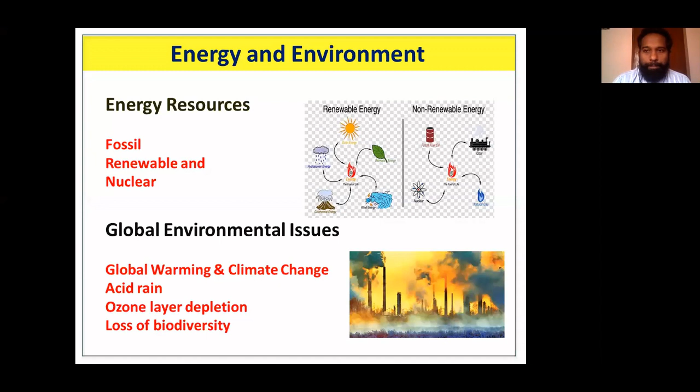Sir, kindly change this slide. They are asking to change it. Yeah, yeah, no, we don't look at the slide.

Because of fossil fuel consumption, currently we face two problems: depletion of fossil fuels along with increasing demand, and environmental damage. To address these two main issues, there are only two solutions: either we reduce our energy consumption through energy efficiency measures and energy audits, or we switch over to alternative energy sources like renewable energy.

Here we focus on reduction of energy through energy auditing. The other solution is renewable energy, which we will discuss in the next webinar.

For sustainable development, energy is the key for any developmental activity. Countries which use energy efficiently will succeed economically. Whatever we use should be in an optimized manner so that we can save something for our future generation. Sustainable development is development that meets the needs of the present without compromising the ability of future generations to meet their own needs.

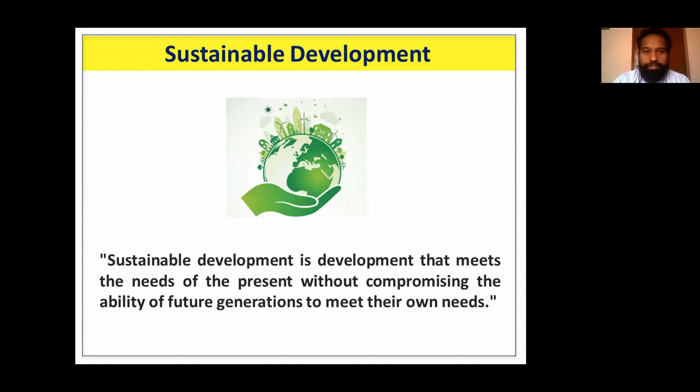Let us understand energy efficiency and energy conservation. Though both appear similar and related, they have distinct definitions. Energy efficiency is using less energy for the same output or service. Energy conservation is linked with behavior change - reducing or going without the service to save energy.

Here is an example with a TV and the number of hours used. Instead of watching for 8 hours, if I watch for 4 hours, I am going without that service for 4 hours - that is an energy conservation practice, I am practicing energy conservation. Here I am not reducing the number of hours of TV usage, but I am using an energy efficient TV.

So I am watching 8 hours, but with energy efficient TV, here I am practicing energy efficiency. Another example: when you leave a room, you turn off all your lights. That is an energy conservation practice, you are avoiding and reducing that service. If you replace all your inefficient incandescent bulbs with energy efficient LED lightings, that is an energy efficiency practice. So both energy conservation and energy efficiency lead to monetary and energy savings.

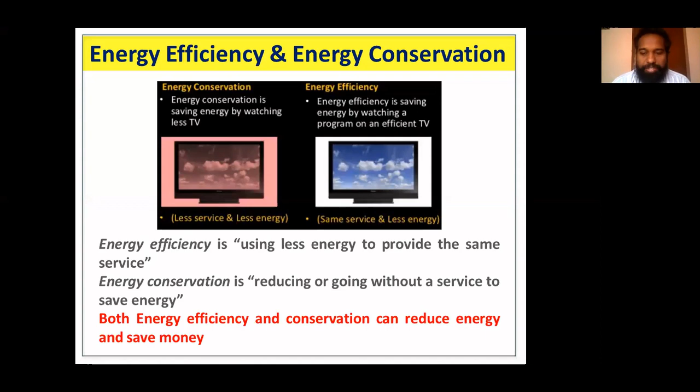So these are the benefits of practicing energy efficiency: reduced waste, reduced energy cost, improved quality, increased productivity and profits, increased competitiveness, minimal damage to the environment. It will ensure energy security, and finally, it will lead to sustainable development.

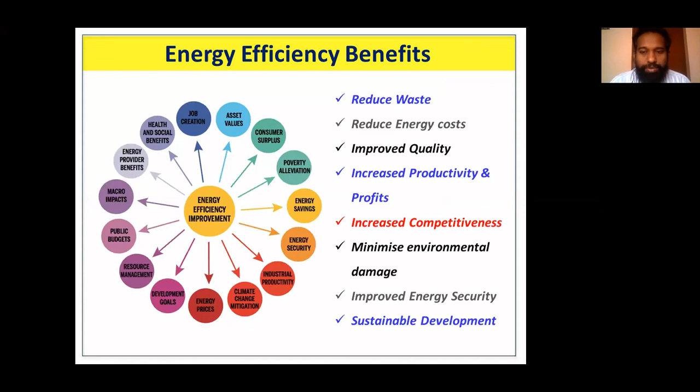So the basic definition of energy efficiency is useful energy output from total energy input.

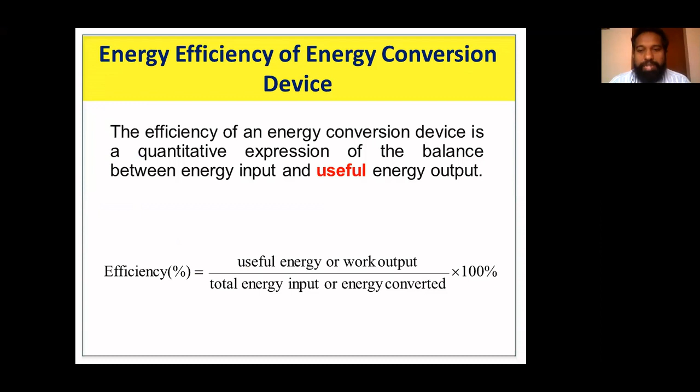Here you can see a list of various energy conversion devices which we use. Electric heater: electricity to thermal energy, efficiency 100%. Hair dryer, again 100%. Electric generator: mechanical energy to electricity, 95% efficiency. Large electric motors, 90%. Battery: chemical energy to electricity, 90%. Steam turbine: thermal to mechanical, 45%. Automobile engine, 25%. Fluorescent lamp: electricity to light energy, 20%. Incandescent bulb has very low efficiency: electrical energy to light energy, 5%.

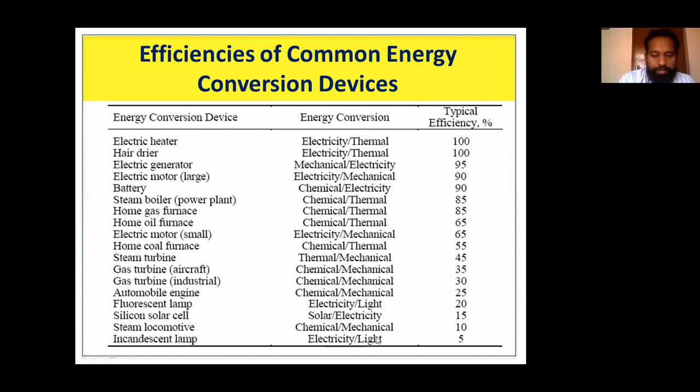So here let us understand overall efficiency. In a system, there are so many energy conversion devices. For example, here you can see a boiler, which is an energy conversion device, and we have turbine and generator. In a power plant, these energy conversion devices are used, and each will have a different efficiency. The boiler has efficiency about 88%, the turbine has efficiency of 40%, and the generator is 98%. So how do you arrive at overall efficiency?

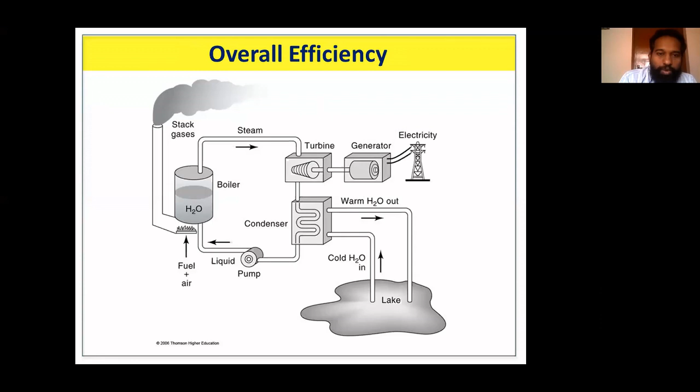In the boiler, chemical energy is converted into thermal energy, steam. The steam goes to the turbine, where the thermal energy is converted into mechanical energy. Again, the mechanical energy is converted into electrical energy. So overall efficiency equals efficiency of boiler multiplied by efficiency of turbine multiplied by efficiency of generator: 0.88 into 0.4 into 0.98, you will get 0.35. So the overall efficiency of the thermal power plant is just 35%.

So where does the remaining 65% go? That will be the waste heat from the thermal power plant. This heat will go either through the cooling tower to the water body as thermal pollution, or it will go through the stack.

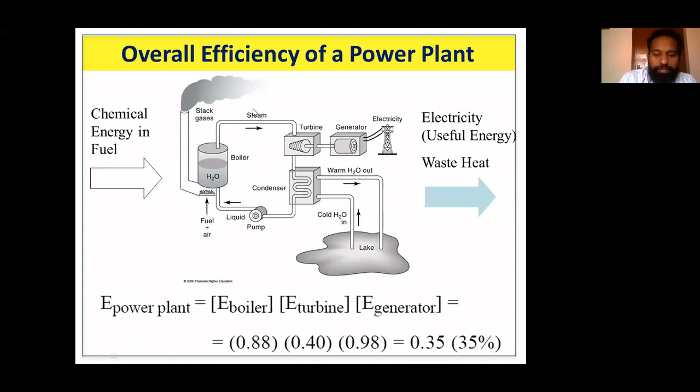So next one is the lighting system. Here also we will see the overall efficiency. Starting from the power plant, 35% efficiency, transmission lines 90% efficiency. We are using an incandescent bulb at home, so its efficiency is just 5%. So the overall efficiency from chemical energy, from fuel, till the light energy we get at the end - if you multiply all the efficiencies, you get only 1.6% efficiency.

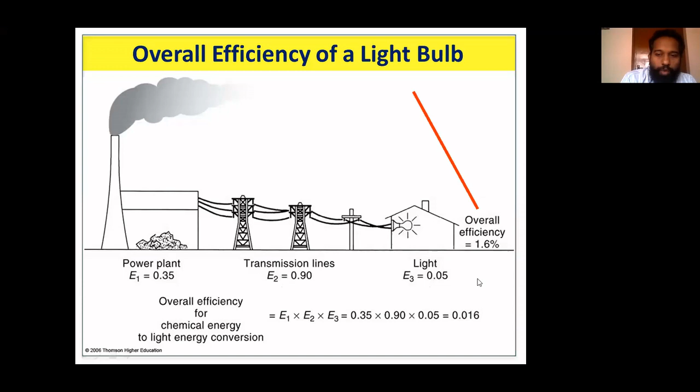So, energy audit. Energy audit is the tool and systematic approach to achieve energy efficiency. Through energy audit only, we can identify different energy waste streams and quantify them. As per the Energy Conservation Act 2001, it is defined as the analysis of use of energy efficiency in a factory or any industry, and it should also include a report which should have all your energy efficiency options along with cost benefit analysis.

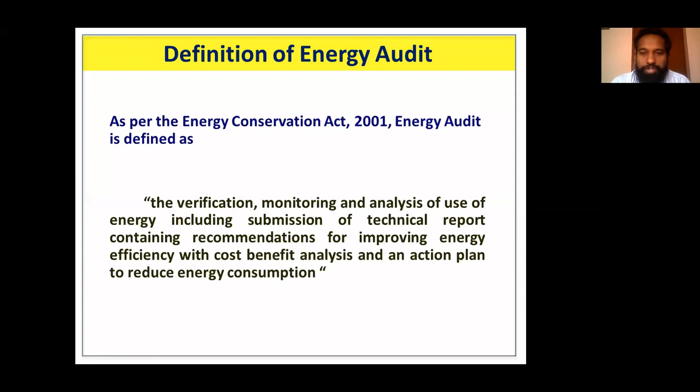There will not be any manufacturing process without a loss - all manufacturing processes will have a loss. So this energy audit will help us identify various losses resulting from an industry, and will also investigate all facets of the facility, historical and current use, to identify and quantify energy waste. It will also help us arrive at a benchmark: what is the energy consumption per unit of my product, the specific energy consumption - for example, I am consuming 200 units per ton of a product. This kind of reference benchmark you get only if you conduct energy audit.

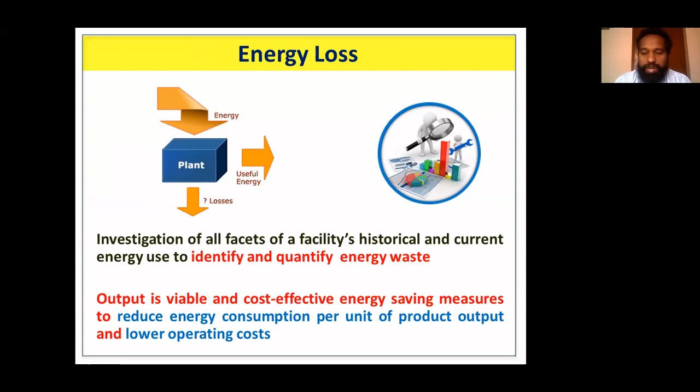So in any industry, there are three main operating expenses: one is energy, the second is labor, and materials. Energy is the top ranker of all cost reduction. So through energy audit, we try to reduce this energy cost, and this will also help us in managing energy in the organization.

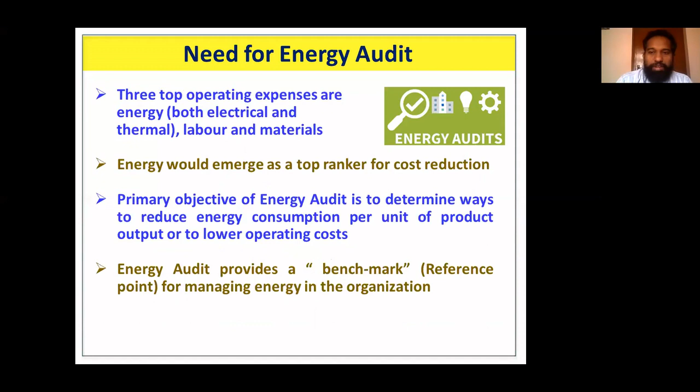Energy audit is classified into three main categories: preliminary energy audit, targeted energy audit, and detailed energy audit.

Preliminary energy audit is nothing but a walkthrough audit. While making a walkthrough in any industry, an energy auditor will observe some easily, readily available energy options, otherwise called low-hanging fruits. You will observe leakages like steam leakage, compressed air leakage, unnecessary lighting, and insulation problems. These things don't require detailed analysis. Just by walking through, an energy auditor, with his experience, will identify these simple measures, which are immediately readily implementable options. This is about preliminary energy audit.

Targeted energy audit is according to the requirement of the client. The client may require us to focus only on a particular energy intensive equipment, for example, refrigeration system, boiler, fan system, or compressor system. So we focus only on the targeted energy intensive equipment in targeted energy audit.

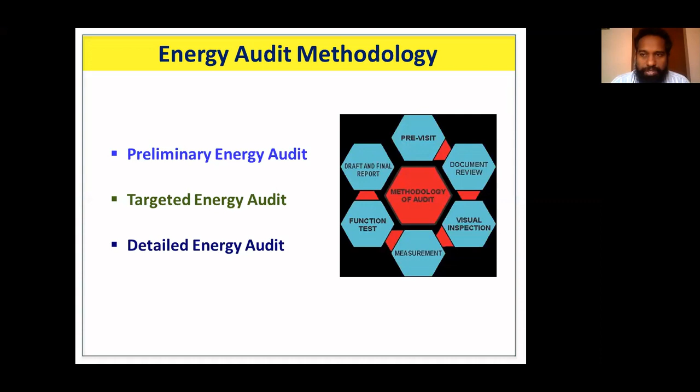In detailed energy audit, we thoroughly investigate all energy intensive equipments used by the industry. The preliminary energy audit takes just 1 or 2 days as a walkthrough audit. For target audit, it will take 1 week. Detailed energy audit will take 1 or 2 months.

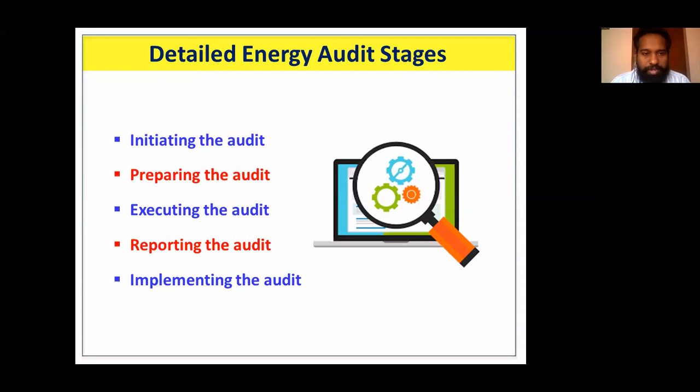There are different stages while doing detailed energy audit: initiating the audit, preparing the audit, executing the audit, reporting the audit, and implementing the audit. This is done in 10 steps.

In the first step, we try to get information from the client, historical and current data, all information from the client. In step 2, we plan how much time is required, what type of resources we require, propose the audit team, and determine what instruments are required. All these things we prepare in step 2.

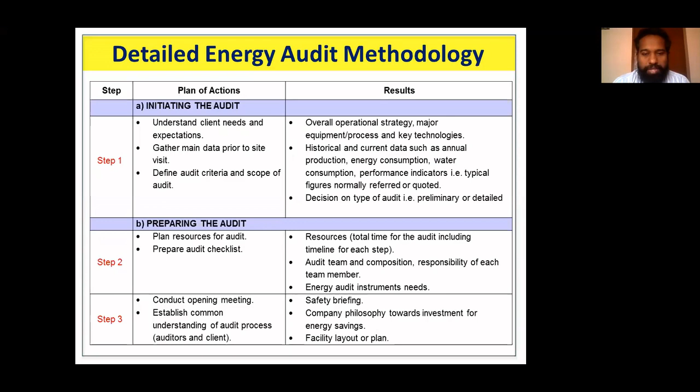In step 3, we conduct an opening meeting with the client and explain the audit process. In step 4, we again go to the field to gather more information and try to understand their process activities, operating practices, and their energy reporting and monitoring system, and we develop an energy utility diagram.

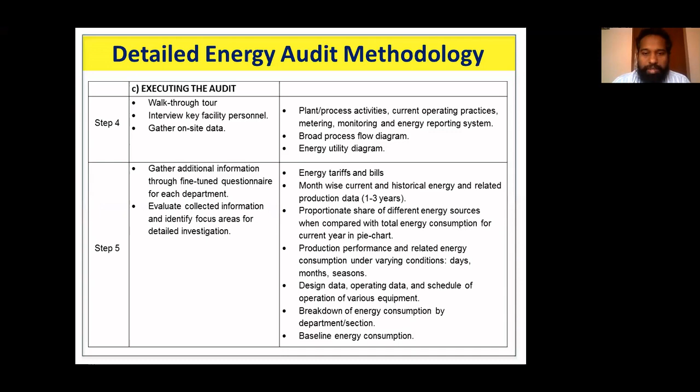In step 5, we gather additional information with the help of a questionnaire, so that we can compare the design data with the actual measurements.

In step 6, we conduct on-site trials in all energy intensive equipments. We conduct performance trials and evaluate performance, and cross-check with the design to see whether it is delivering the design values or whether the design has degraded.

In step 7, after conducting performance trials and getting data from the client, we analyze the data and do energy and material balance, and try to evolve energy conservation options with the help of a brainstorming session with vendors and the client.

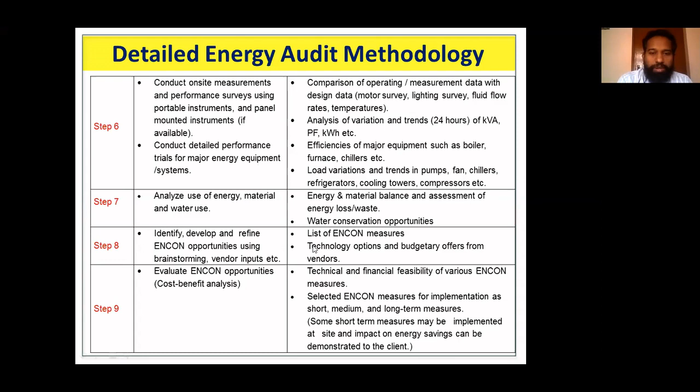In step 8, we list out the energy conservation measures, and in step 9, their cost benefit analysis. In step 10, we close the audit.

We make a brief presentation about the key findings to the client in the field itself. After coming back from the field, we do a detailed evaluation of all options, calculate their technical and economical viability of each option, and present it in the report, which is our final report.

Step 11 is out of the purview of the energy audit. It is the action plan for implementation of the suggested energy conservation measures.

For implementation, clients get it done either through energy service companies called ESCOs. For that, we also help them prepare a detailed project report, or DPR.

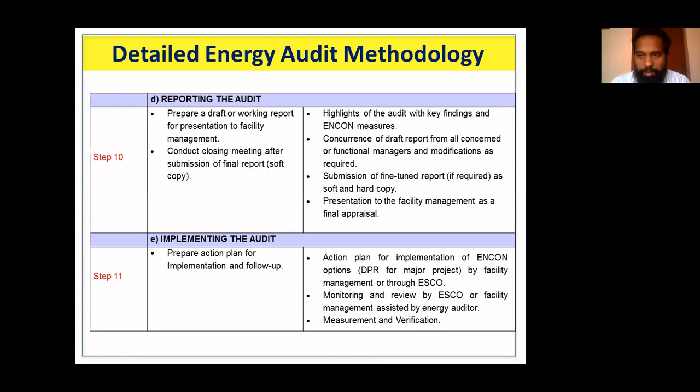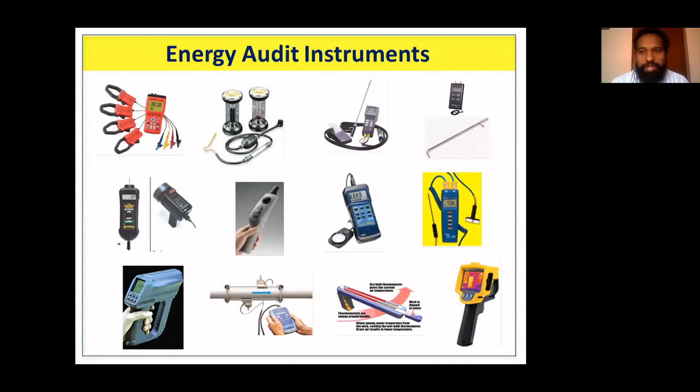Using these instruments, we conduct performance trials in the field.

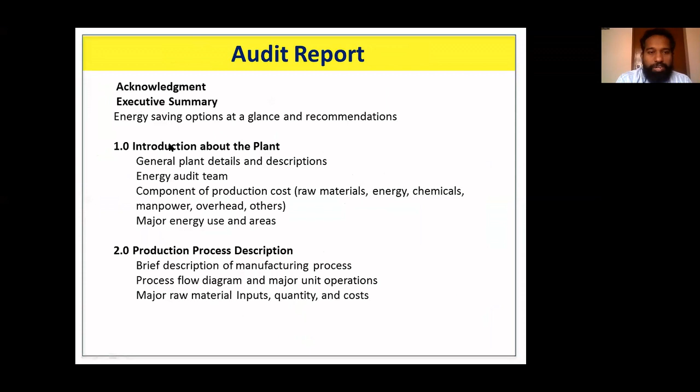This is the audit report format. It should start with acknowledgement and the executive summary. The executive summary should present all energy saving options with cost benefit analysis. Then we have an introduction about the plant, followed by production process description and energy and utility system description.

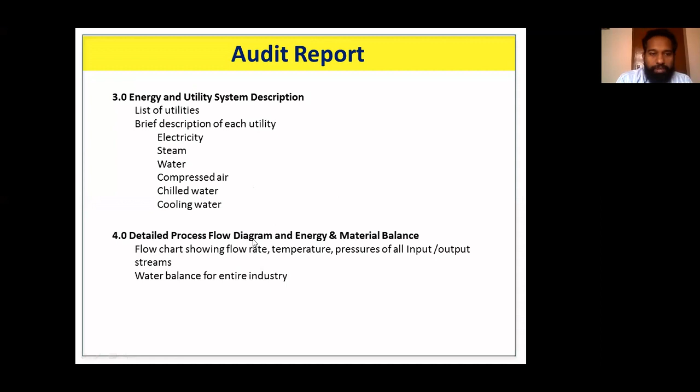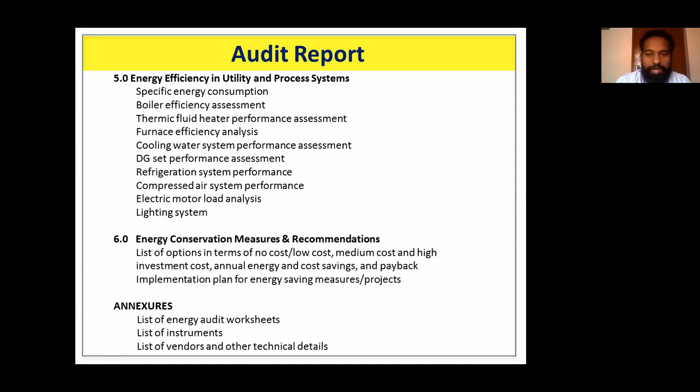In chapter 4, we present a detailed process flow diagram and energy and material balance. In chapter 5, we present all measurements done on energy intensive equipments, the performance assessment trials. Finally, in chapter 6, we present all energy conservation measures and recommendations. In the annexures, we include worksheets and a list of instruments and vendors where they can get the required energy efficient technology.

So for implementing the energy efficiency measure, ISO 50001 is also a tool that aids the implementation process. ESCOs also help, and we, NPC, also help in preparing a detailed project report for quick decision making.

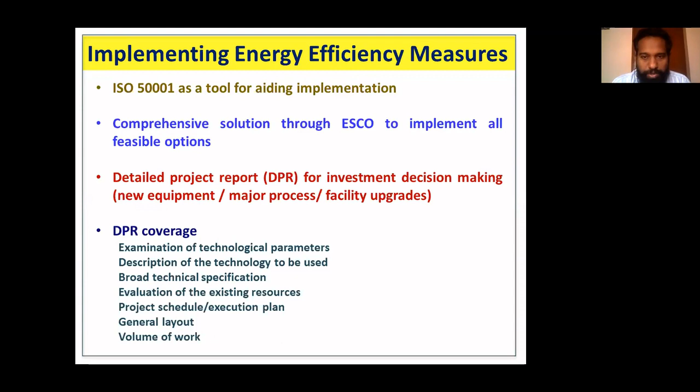So now we have understood about the audit methodology. Now we will move on to how to do energy auditing of electrical equipment.

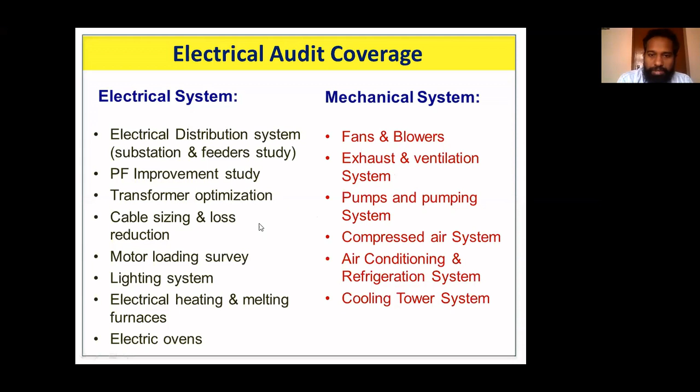As far as the electrical system is concerned, the scope for energy saving is very less. If you look at the pure electrical system, it will have only the electrical distribution system, transformers, and motors. Our focus should be more on driven systems - mechanical systems like fans and blowers, exhaust ventilation systems, pumps and pumping systems, compressed air systems, air conditioning systems, and cooling tower systems. All these mechanical systems are connected to motors, so if you focus on these mechanical systems, it will automatically lead to energy savings in the electrical system.

Transformers are highly efficient electrical devices - the efficiency will already be in the range of 95 to 98.5%. Then comes your distribution line; distribution loss is also very less in electrical systems. Finally it is connected to the loads - fans and blowers, pumps, all your loads, lighting and so on. So if you look at savings in the pure electrical system, the savings will be very minimal. You should focus more on driven systems.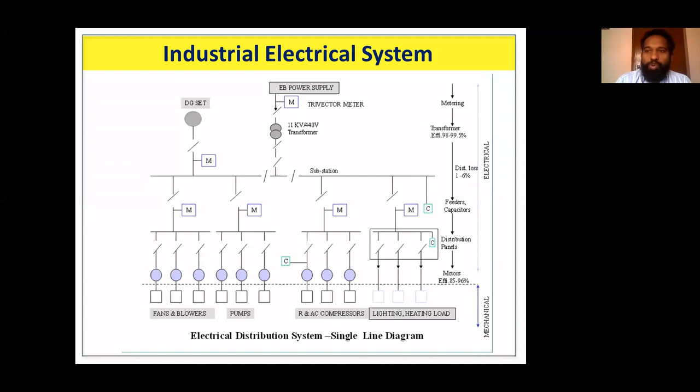The maximum demand controller is an excellent tool for load management. What it does is keep tracking your maximum demand and compare it with a preset demand value. Once your maximum demand reaches the preset value, it will automatically shut off all unnecessary loads, thereby reducing your loads. If there is no maximum demand controller, you will definitely face KVA demand charges because of not using this maximum demand controller.

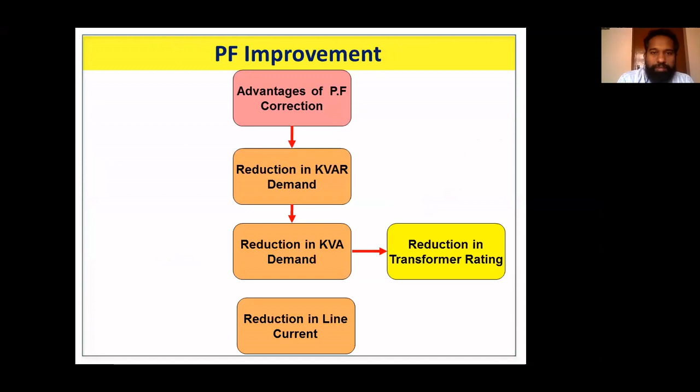Next is power factor improvement. The advantages of power factor correction: you will avoid unnecessary penalties from the EB, that is the utility, when you maintain the power factor in the range of 0.8 to 0.99. We will even get incentives from the utility board. This will also reduce your KVAR demand, KVA demand, and line current - these are all the advantages of PF improvement.

If you reduce your KVA demand, your transformer rating will also reduce, thereby reducing your cost. Reduction in line loss is also an energy saving measure, and also reduction in KVA demand.

If you look at the energy bill of an industry, it has two parts - demand charges and consumption charges. Consumption charges depend on the number of units, kWh. Demand charges depend on the KVA value. So if you maintain a very good power factor, this KVA reduction will take place, thereby you will get a reduction in your demand charges.

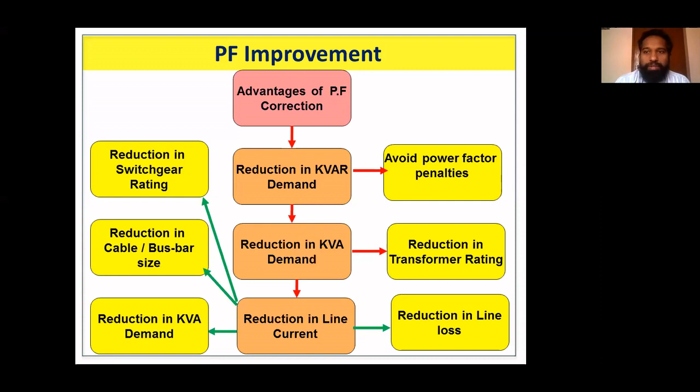There is also a reduction in switchgear rating and reduction in cable size - all these benefits you get once you improve the power factor of your electric system. How do you improve this power factor? By choosing the right capacitor, you can go for PF improvement.

As I already told you, these transformers are highly efficient electrical devices - the efficiency is already in the range of 98 to 99.5%. Still, we can have some simple measures. To further improve its efficiency, we should try to match the load with the transformer. The next measure is we have to distribute the load equally to the transformers, since there may be underloaded and overloaded transformers.

If your load to the transformer is less than 50%, there will definitely be a power loss. So all your transformers should be loaded beyond 50% - try to maintain above 60% loading on your transformers. If you use two transformers, you can equally distribute the loads, 60% loads to each of the two transformers. The next measure is to disconnect the transformers when not in use.

Another option is if your transformer is very old, say 35 years have passed, then you can try new efficient transformers. These have an amorphous core, which will reduce your no-load loss. 80% of no-load loss will be reduced if you use amorphous core transformers, and they can have efficiency more than 99.75%. So if your transformers are very old, you can choose amorphous core based transformers.

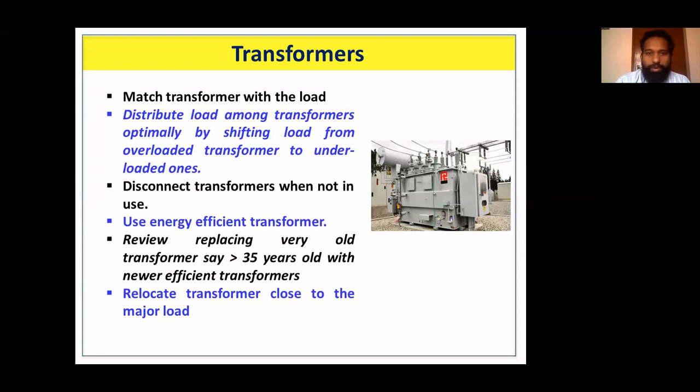Next one is motors. 70% of equipment in industries is powered by electric motors. Here, operating cost is more than 100 times the purchase cost. That is why, while choosing a motor, you should always look into its operating cost. If you simply go for a cheaper one, remember the operating cost is 100 times the purchase cost. So you should be very careful in selecting a motor. Don't go for low efficient and cheaper motors.

All your motors should be operated at a minimum load of more than 50%. If you look at this loading versus efficiency curve, at 50% loading of a motor the efficiency will be around 75%. If you operate your motor at 25% loading, your efficiency will decrease to 50%.

While doing a motor survey as an energy auditor, we focus on motors rated more than 10 HP. Small motors usually we don't focus on for better energy savings - we focus only on motors with 10 HP and above, since there will be more than 100 to 200 motors in an industry.

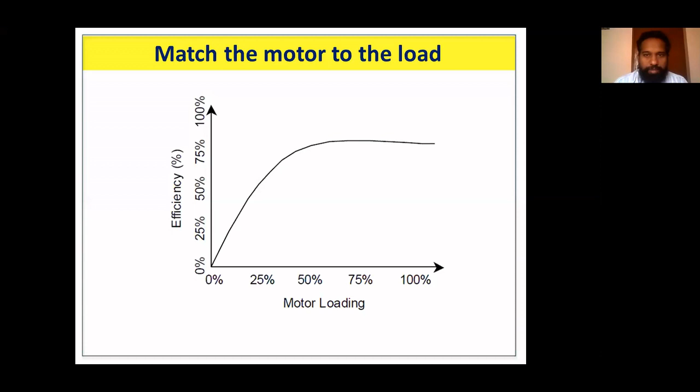This is a case example of an inefficient motor with 91% efficiency, that is an IE1 motor. There is a classification of motors according to their efficiency: IE1, IE2, IE3, IE4, and recently IE5 also. IE1 is the lowest efficient, IE2 is better than IE1, and IE3 has a little more efficiency - so depending on efficiency they are classified into 5 types. Here the old motor has only 91% efficiency; it's a 37 kilowatt motor. If you replace this with the latest IE3 motor of the same capacity, you get more efficiency, around 94%.

This results in direct energy savings, going from 91% to 94% efficiency. Using this formula, we get 2.88% energy saving if you implement this measure. The annual energy saving is around 4,206 units per year. Earlier, using the old motor, energy consumption was 1,46,052 units in a year, with operating days of 360 days, 10 hours per day. Now with this improved efficient motor, about 4,200 units will be the reduction in annual energy consumption - so you get this benefit if you replace the old inefficient motor with the latest energy efficient motor.

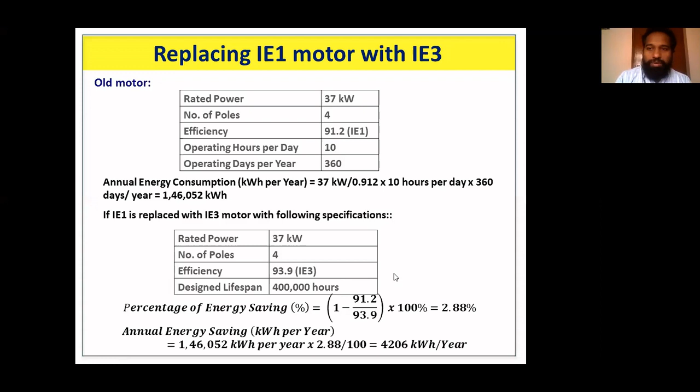So simply you cannot switch over IE1 to IE3 or IE4. You have to work out cost economics. How many hours of operation are you going to use? What will be the capacity of the motor and all those parameters we have to calculate before going into the option. So next one is lighting.

So lighting also we can go for energy efficient lighting. Basically we have four types of lights: old incandescent, fluorescent tube light, gas discharge lamps, and the latest one, light emitting diode lamps.

So the first option will be to try to use daylight with the help of skylight and transparent sheets. You try to use freely available sunlight to enter into your workplace. So that will be the best option.

Then the second option is you can go for energy efficient lights. You can try T5, LED, induction lamps. So according to your illumination requirements, lumen levels, and according to your task, you can choose your energy efficient lightings.

Then other control techniques, timer based. For all your street lightings around your campus or industry, you just fix a timer. So evening 6 o'clock it should be on, morning 6 a.m. it should be off. So this timer also will save some energy.

So voltage control also will save energy. Occupancy sensors: when you leave the room, automatically it will shut off. All your lights will get turned off.

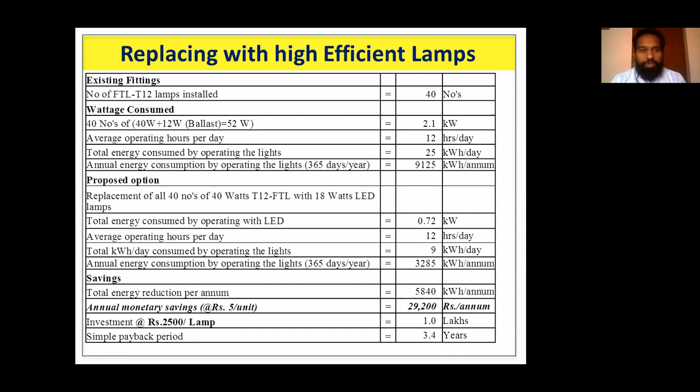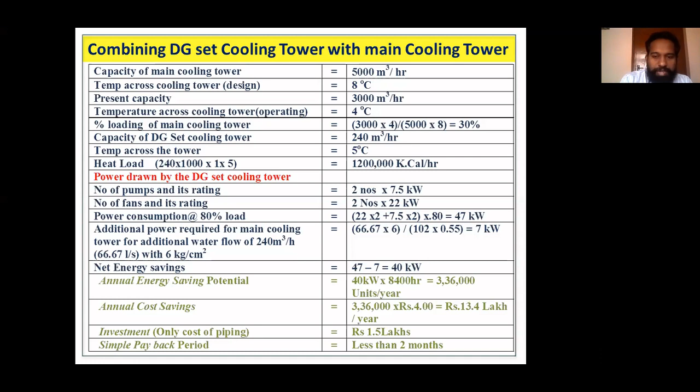So regarding investment, if you see, you will be surprised - it's no investment. We have totally removed the DG set cooling tower, and there is only piping cost to connect this new 240 meter cube load to the main cooling tower. So the investment is less than 1.5 lakhs.

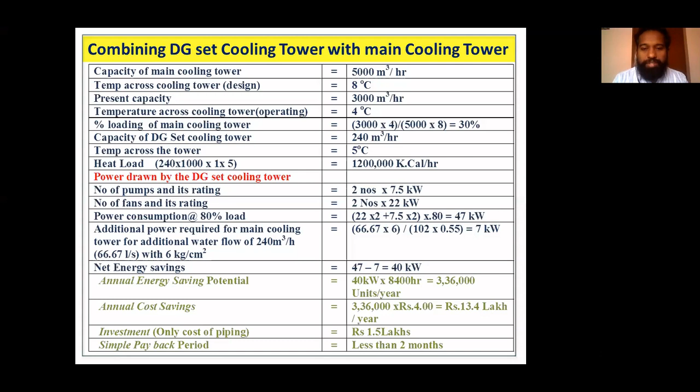Another case study was done with fans - replacing an existing fan with an energy efficient fan. Let us continue with this efficiency measure in fan.

We measure the initial flow rate and static pressure, and we measure the initial efficiency of this fan. It was just 56%, so we suggested them to go for an 80% efficiency fan. Thereby the revised power requirement is 3.43 kilowatt, and the annual savings is around 63,500. So this is the saving measure in the case of fan.

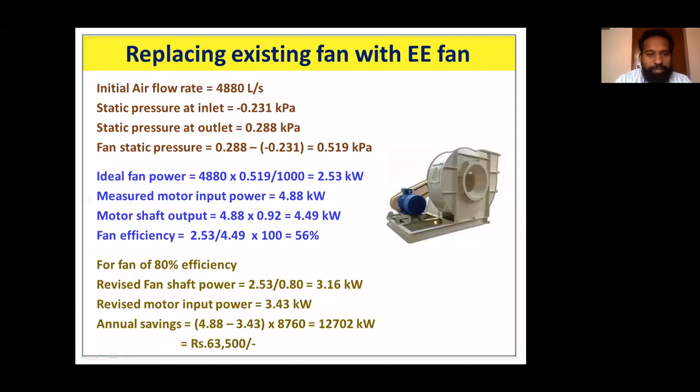Other potential is variable speed drives - if there is a change in flow and head requirements, we can use variable speed drives. In the case of all pumps and fans, instead of damper control, we can use VSD technology. It is very economical even when flow requirement is 75 to 85% of the rated capacity.

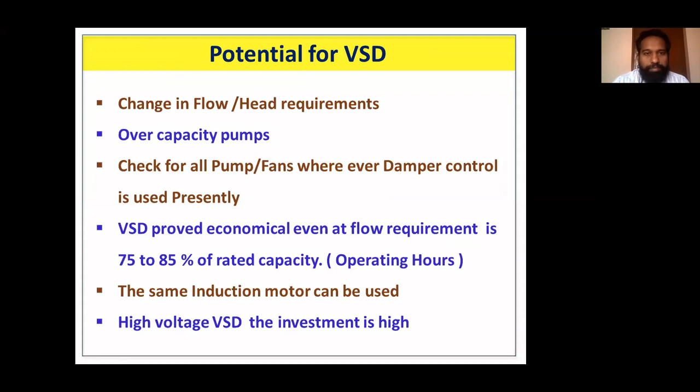This is in the case of compressed air. If you allow compressed air leakage, there will be an energy loss. In this table you can see if there is a leakage through 1 mm, so many liters per minute of air will be leaked, and the corresponding cost loss is 21,600 per year. If you go to any industry, if the compressed air system is not managed properly, definitely you will find 40% leakage.

This leakage's admissible allowable limit is just 10%. So if you find this leakage, you try to calculate it in terms of energy, and we can present it as an energy saving measure.

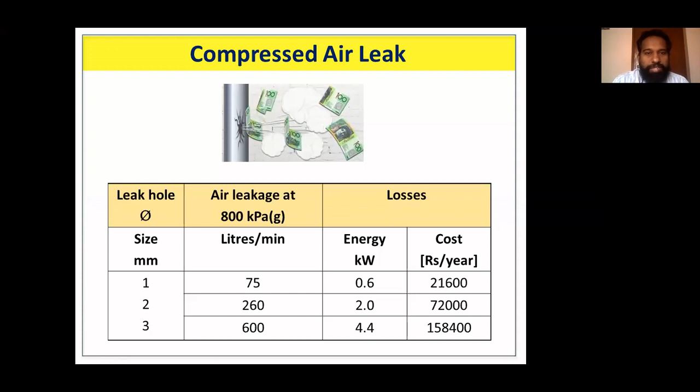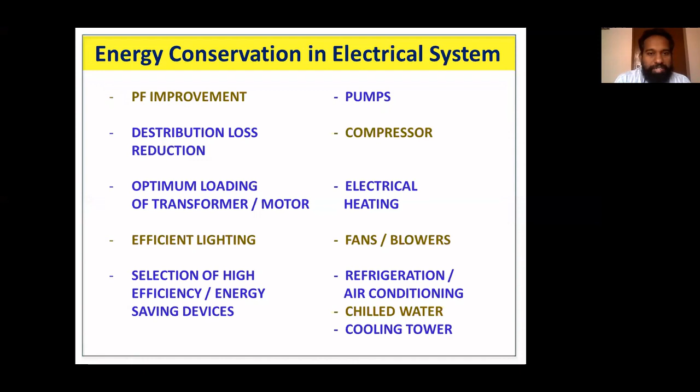As I said, in the electric system, we will not find much scope for improvement if you focus only on distribution loss, PF improvement, optimal loading of transformer, lighting. But we need to focus more on driven systems - pumps, compressor, fans, blowers, refrigeration and air conditioning system, cooling tower, etc. Next we move on to auditing of thermal utilities.

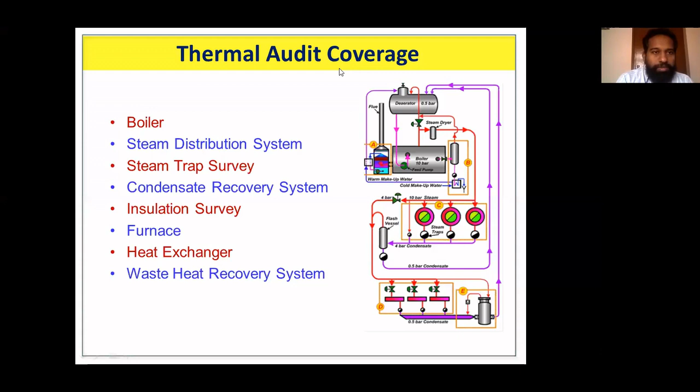Sir, we have some questions also. Continuing, it's going on. One of the participants has asked about IE4 motors, whether it is a good option for blowers.

We will allot about 15-20 minutes for question and answers. Now let's move on to thermal auditing.

For thermal auditing, we'll cover boilers, steam system and condensate, furnace, heat exchangers, and waste heat recovery systems. Let's quickly go through some of the slides.

If you look at the boiler types used in India, we use subcritical and supercritical boilers. Subcritical boilers generate steam at pressures and temperatures below the critical condition.

The critical condition of steam is 221.2 bar and 374.15 degrees centigrade. If you generate steam and operate your boiler below this critical condition, it comes under subcritical, and beyond that critical condition, your boiler is supercritical.

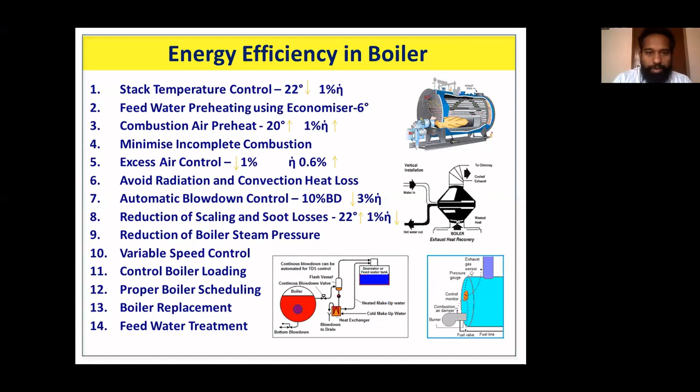Our Ambedkar Institute of Productivity is at Chennai. It was started in 1963, originally as a training center at Chennai. In 1973, it was made a separate entity, for development of consultants of NPC.

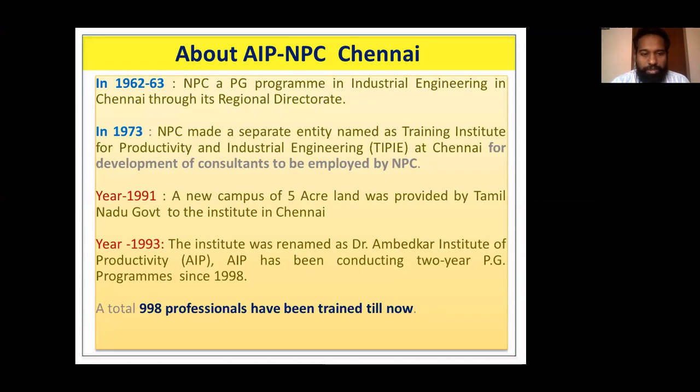In 1991, we got 5-acre land from the Tamil Nadu government, and in 1993 it was renamed as Dr. Ambedkar Institute of Productivity. We have been regularly conducting a 2-year PG program since 1998 for our newly recruited assistant directors and consultants. A total of around 1,000 professionals have been trained till now.

We conduct the prestigious national certification for energy auditors and energy managers since 2003 on behalf of Bureau of Energy Efficiency. So far, more than 10,000 candidates have qualified and are practicing energy efficiency in their place.

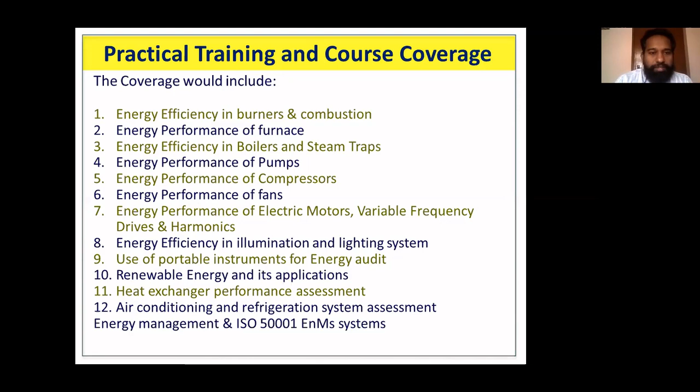Here we give practical training for students and industry people. We also undertake customer tailor-made programs. This is a list of trainings and course coverage we conduct in our training center at Chennai CETE.